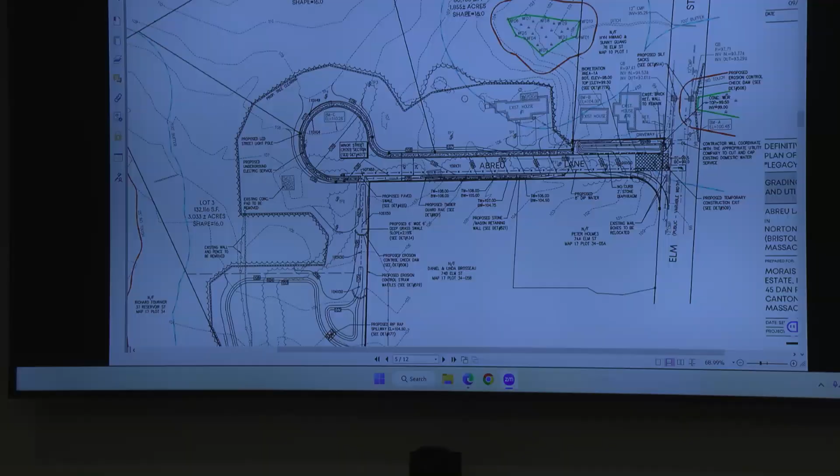A new roadway is proposed, which will have some drainage components. There is a bioretention area sited in this part of the project, which goes within about the 100 to 80-foot buffer to the wetland across the street. There will be some work to demo the existing house in this area, which will be within the jurisdictional buffer to the wetland as well. Then there's the cul-de-sac in the back of the lot, with additional drainage for the remainder of the roadway. I will also show you a build-out plan, which is a conceptual plan that the drainage has been based on to size the drainage structures and components.

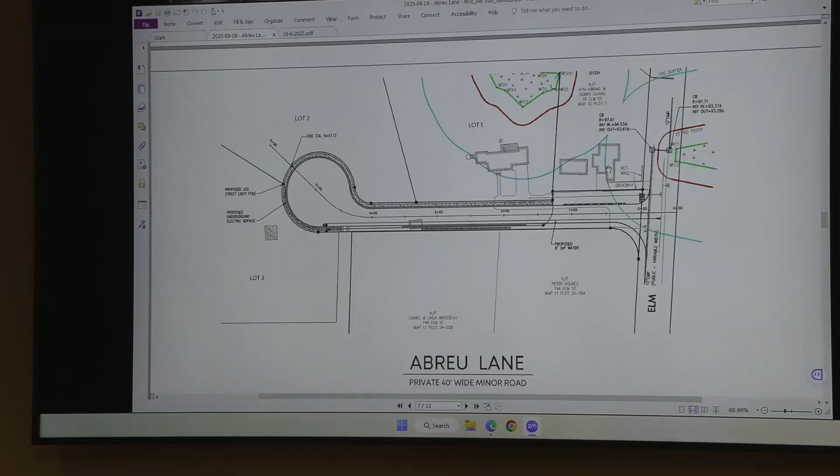This is all part of a plan set. This again shows the drainage areas. For the subdivision, we're required to provide a plan and profile.

This is a conceptual build-out layout of the project. It shows the 3 duplex houses being proposed. As you can see, this lot will have some work within the buffer zone to the BVW. However, the entirety of lots 2 and 3 are outside jurisdictional areas. So we've provided the drainage that is designed, including the impervious areas and different site characteristics, grass, lawn, woods, that would go along with this proposed development.

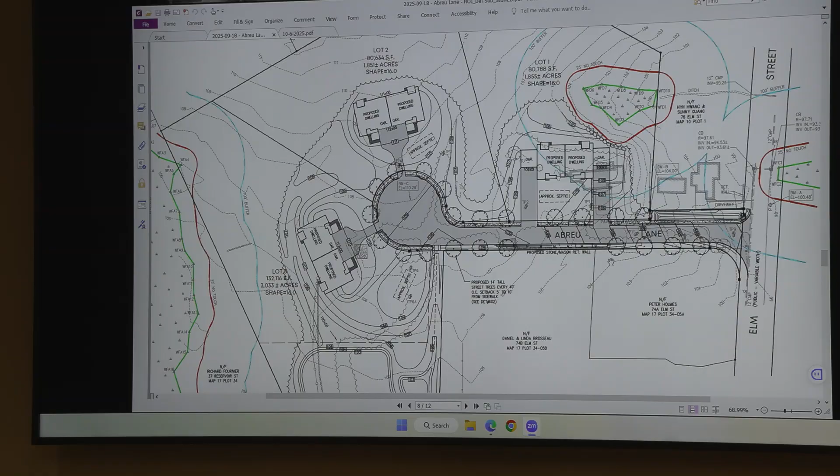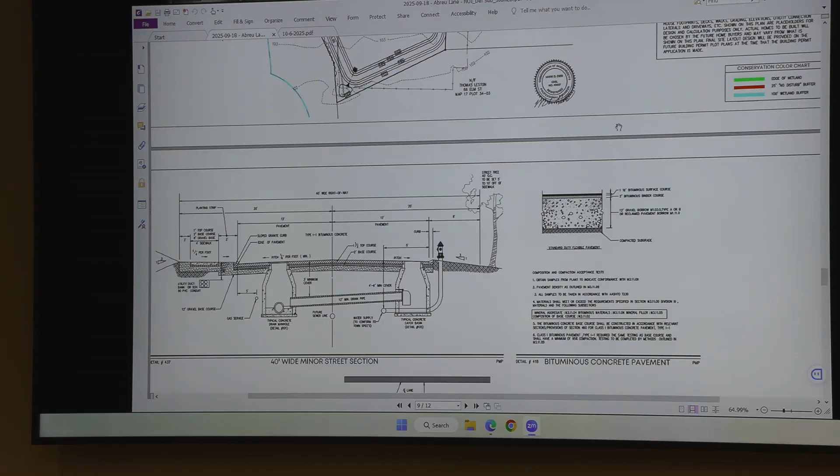The remaining sheets in the set and details are the cross-section and standard subdivision type details, as well as the straw wattle erosion control, temporary erosion control measures that will take place out in Elm Street, silt sacks at the existing catch basins in Elm Street, and items such as that are in the construction details. We do believe it meets DEP regulations, and believe it is worthy of an order of conditions. However, that is my presentation, and I'd be happy to answer any questions you might have.

Could we see the first diagram that you put up, the one that had the larger picture of both Elm Street and Reservoir Street? Does this require stormwater? Well, that's one of the questions I wanted to ask, so it's at your discretion.

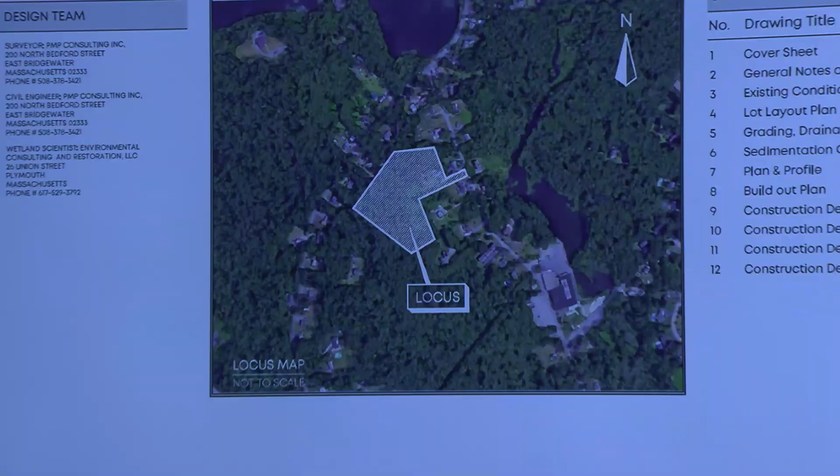Maybe if you could enlarge that a little bit. Still not seeing anything. So just to kind of give everyone an idea of what address this is at, 76 Elm Street. But it abuts multiple properties on Reservoir Street, is that what you're asking? That is correct. The rear portion of the property does abut reservoir parcels.

Did it come through there yet, Dan? Well, what I was going to say is that I believe not far from there, we had some people who were complaining that the water was too high, somewhere on Reservoir Street. Maybe it was a little bit south of the locus there. I think it was across the street where the BVW is connected by a swale or a pipe under Elm Street. It was the house across the street, Mark. That was during the ANRAD process, Dan, right? Not sure, don't remember. It was one of the abutters who mentioned it.

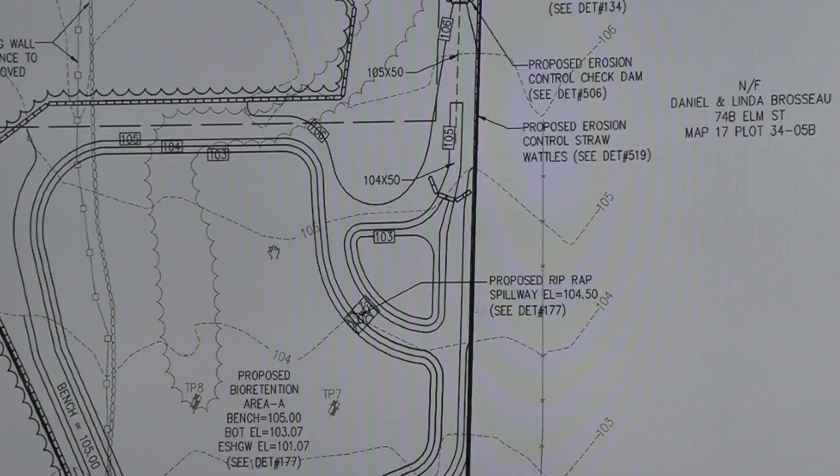So from the high point of the road, this segment of the road is draining, sheet flowing off into a bioretention area that will manage that runoff for the property, for that roadway. Again, there's test pits, groundwater is not far below the bottom of these things, but it does meet stormwater management standards. These are at least 2 feet to groundwater, and the remaining area just gets sent to the rear of the site, down here. Other than managing it through an infiltrating bioretention area, that is essentially the extent of the runoff or stormwater management control for that first portion of the street.

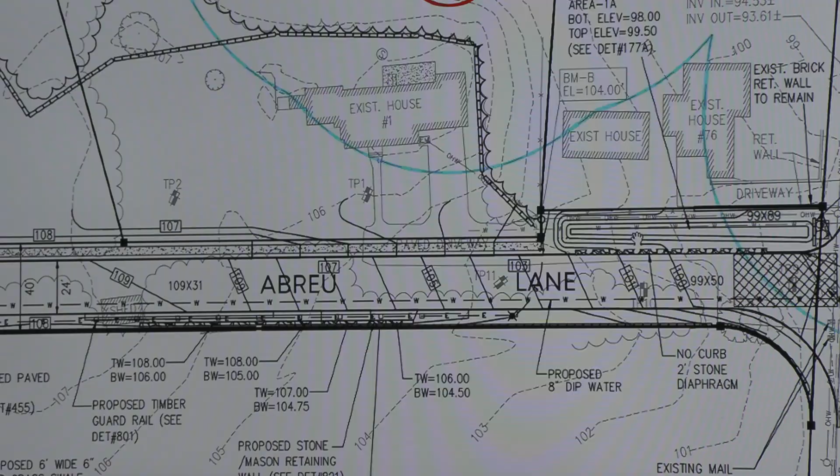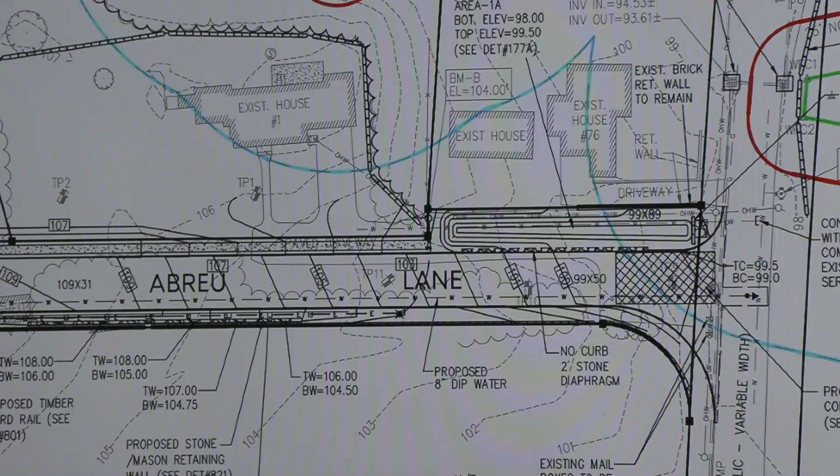So is that what you're referring to, Dan? I think, actually, maybe the houses I thought of weren't quite that close upon further reflection, the ones on Reservoir Street. But with regard to this drainage direction, Mark, does it reflect the current pattern on the site? Currently, the existing site does drain down the existing driveway with no stormwater management. You can see that the 106 contour, 104, 103, 102. So the existing single-family home driveway would drain out into Elm.

So the stormwater management report we provided does show a reduction of runoff to what I think we call drain point 1, which is out at this property limit. And you have something illustrated running alongside the driveway that is kind of checkered or whatever. Is that intended? Well, what does that denote? That is a sidewalk. Oh, okay.

So there's no structure that would accept the sheet runoff from the driveway? It just goes down into, is it a catch basin structure or? There is a gravel strip right here, signified from here down to here, that does some filtering before it hits the bioretention area. But before that, there's a Cape Cod berm or curbing, I don't have off the top of my head. But it'll channelize and then sheet flow off once it gets down to the basin.